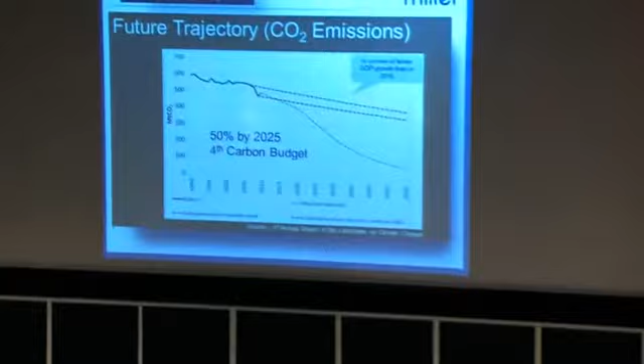This information is from the Committee on Climate Change, which is responsible for informing government to help shape policy changes. What the committee is saying is that we need to follow the green dotted line to achieve our goals. It's quite plateau, fairly stable reductions initially, because we still need policies in force and research and development.

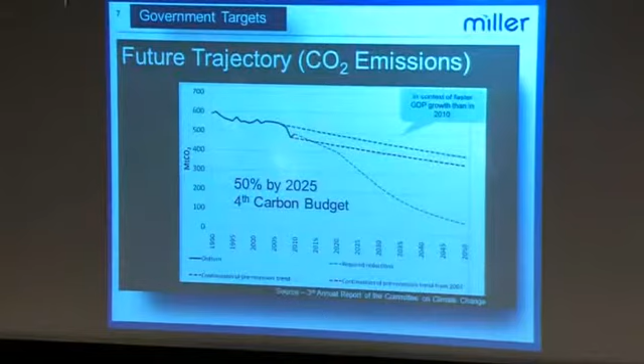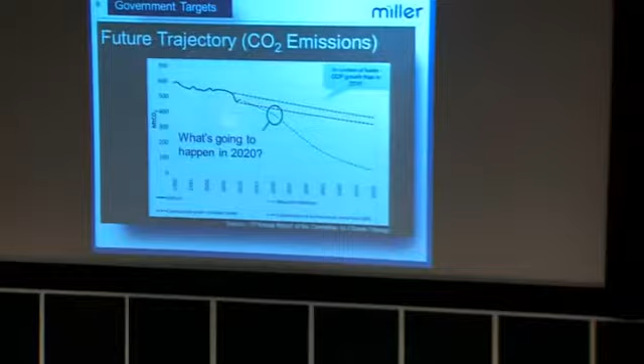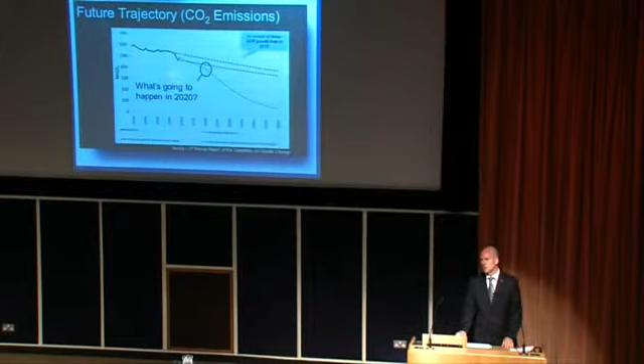There's a step change in 2020 on this green line, and it isn't just put in because they thought it was appropriate. It gives time to research, develop technology and see what happens, and time for policies to come into force. One major thing influencing this in 2020 is power stations, the grid, and electricity supply.

You may or may not be aware of things like smart grids and nuclear power stations. Will that really come into force?

As a side note, I watched a video clip the other day from a website called TED, suggested to me by my uncle a couple of months ago. I saw a presentation by Bill Gates called Carbon Zero, thought it might be interesting, and watched it. It talked about the route map to zero carbon.

One option was zero population, although that might not be the way we need to go. Population is going to reach about 9 billion, they believe, currently around 6.8-ish. But we can look at the services we use, the energy those services use, and the energy efficiency side of things.

He came out with a solution they're backing: nuclear power, taking nuclear waste from existing power stations and burning it in a deeply buried, slow-burning log fashion over a 60-year life, creating electricity from nuclear waste. Sounds good, although there's 20 years of research before they get a volunteer to build one, then 20 years of development.

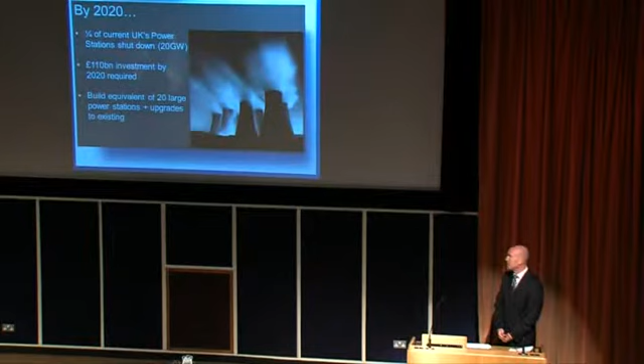Something else noted in the Committee on Climate Change was carbon capture and sequestration. Is that going to be a solution? The government has funded £1 billion this year towards research and development for carbon capture and sequestration, leading to the first trial demonstration project running 2017 to 2018. So all being well, that will be part of it. But there's a bigger issue in what you do when you compress all this carbon into liquid form and shove it into the ground and walk away, hopefully.

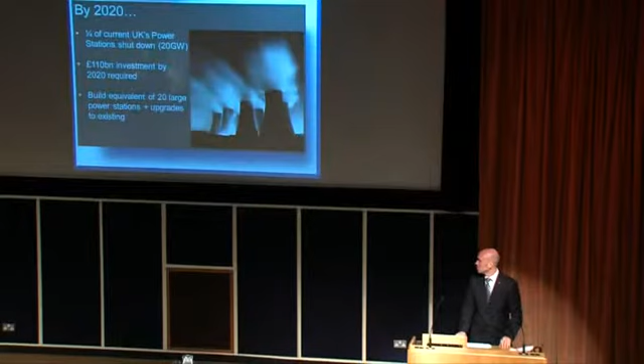We'll see. I'm getting off my comfy topic here of Part L, so I'll get back to that. This is the roadmap for the future, and every 3 years we'll have a step change in Part L, getting steadily tougher. The focus of my presentation will be on Zero Carbon 2019, which applies to new buildings. I'm fully aware, as we all are, that refurbishment is also equally important.

Since 2010, in fact since 2006, we've had Part L mandated on us via government due to the Energy Performance of Buildings Directive. There's only one element of Part L which is actually mandatory, and that's criterion 1, the carbon compliance calculation. The rest you don't need to do, but you do really, otherwise you get into trouble. The carbon compliance is something that is legally enforced.

The next set of regulations, due out next year, have already been through consultation, and we know it's likely to be 10% tougher. We don't know what the draft publication says, although that should be out soon, and we know the intention is to bring it into force next April/October.

The reason I've got April/October is I believe the mandatory part of Part L won't be enforced until October, which will probably allow software vendors to upgrade their software to the new rules and let industry test it, so if you've got buildings falling into the 2013 category, you can see what the impact is going to be. But without that, it's going to be 10% tougher.

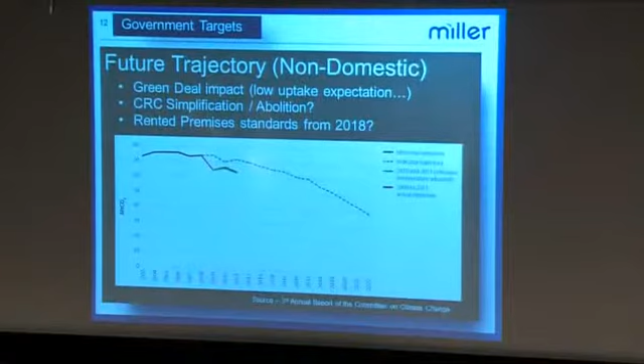I'm going to talk now about Part L, what I call the game, because in my experience over the past 6 years, leading teams modelling buildings for compliance as well as comfort as well as energy, it has become a game. And what you need to know is what's in the software that you are compared against.

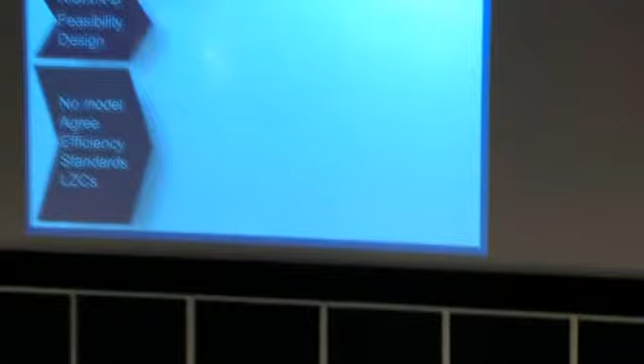Working in the consultancy industry, there's many times when I get involved right at the start. Paul, we've got a new project, we need it to pass Part L, what do we need to know? And we haven't even got a building at feasibility stage. And I say, don't worry about Part L just yet.

Make sure your design is efficient. Make sure the building's orientation is sensible, and all of the common sense stuff that architects, engineers and clients are all aware of. Put in efficient plant and efficient fabric standards, and consider what your renewable solutions may be.

Because you pretty well know now, you don't need to carry out an assessment, you know which you prefer. Do you like biomass boilers or not? Do you like PV panels on your roof or not? Is CHP appropriate for your building? And only then, at concept stage, should you really start trialling it.

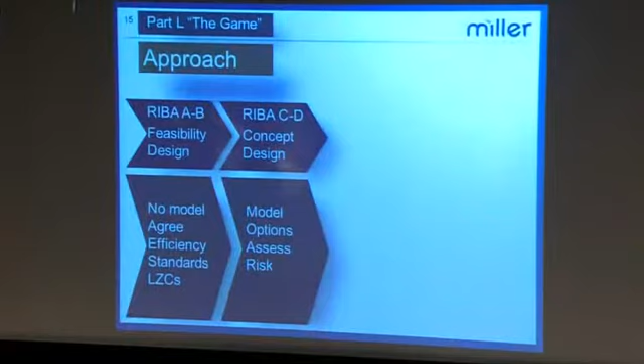Because of the way information flows and changes these days so quickly, you can spend your life trying to catch up with the design and remodel different options. But you should only model, I think, at concept stage, when you've got your building back from the architect, you're happy with the layout - you will be changing it throughout the whole life - but at least you can test, kick the tyres, stick it through a Part L model, put in your efficiency and see what the result is.

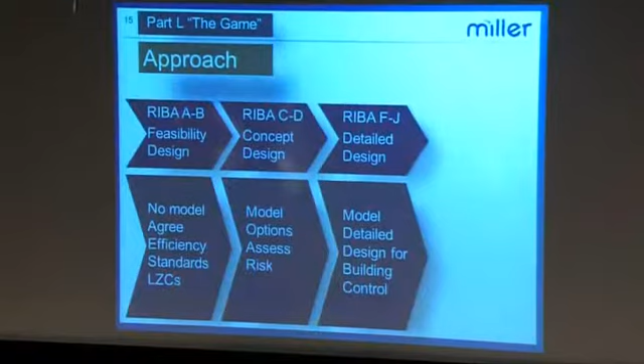At detail stage, when you're going out to tender, you obviously need to make sure that it still passes and is still compliant, because that's going to go to building control. And then there'll be very little change until the end of the building when you construct it.

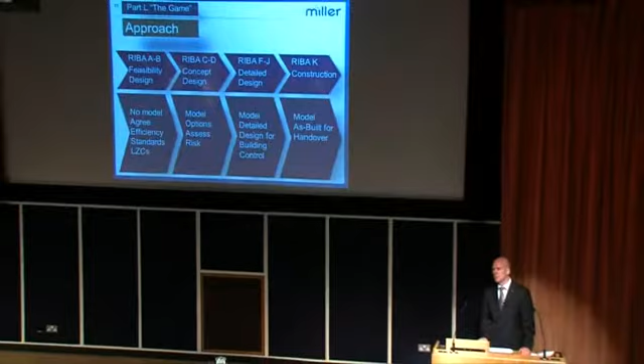The construction process might take a year, might take a year and a half, and the software gets advanced during that time, and you may rerun it and get a totally different result than you did at design stage. That sometimes throws up some problems.

With EPCs, for instance, when you've got a BREEAM target saying you must get a certain score, well, if it's going to change because the software is going to change, that will cause a problem. But BREEAM actually allows you to use the same model software version at design stage for your as-built.

Fortunately, I've got a slide on BIM, and BIM will save the day and make this whole process a lot easier. Is it working now? Well, as a consultant who's worked with BIM for the past 12 months, I've had 1 day's training, and I feel competent to rotate the buildings and do some of the simple stuff.

The engineers, when they took the BIM model and the BIM said 'I am compatible with your compliance,' we threw it into the compliance software, and we had gaps in walls and roofs, and things weren't lining up. It's not quite there yet.

If the building was designed in a compliant way for our software, for our Part L compliance, by the architect, then that'll be okay. So we could take the architect's BIM model and rework it ourselves and recreate it in BIM and then import it to the software. But you might as well create it in the software in the first place.

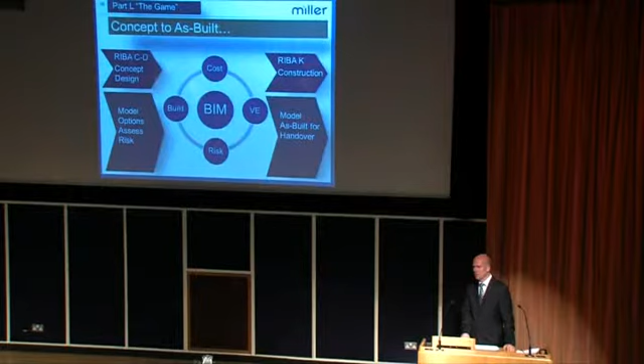It will get there, and the technology, the software, and the users will become more familiar with this. It's similar to what Dan was saying earlier, in that you don't really want the building complex when you import it into a very sophisticated software that's going to look at three-dimensional stuff. You don't want detail.

I'm going to look at a case study now of a student accommodation building and talk you through some of the quirks and interests that this project's actually had for us. I've picked student accommodation, hopefully being quite appropriate - there's quite a lot of student accommodation blocks going up these days. There's some simple main drivers: student experience, flexibility in use. But ultimately, we want efficient use of energy - we don't want to be wasteful of energy.

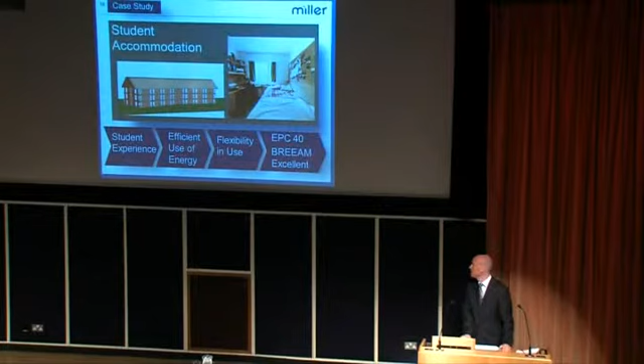There were targets of an EPC 40 and BREEAM Excellent. Funny enough, the planners said 'I want BREEAM Very Good.' The client said 'I want BREEAM Excellent.' But the planner said 'I want you to get the mandatory credits in the EPC, so get the 40, but you can go for BREEAM Very Good.'

So, early stages in the project - Paul, how are we going to pass Part L? We've got a student accommodation block. I said, don't want to model it just yet, haven't got enough information, but just tell the architect and think about some very simple factors.

Let's get back one. On that graph, there's three columns of numbers. The left hand is what I'm saying you should be targeting for your fabric efficiencies. These are U values for your wall, windows, and your roof. They're not really hard U values to achieve, and they're not going to be costly.

The window there at 1.6 is an affordable window U value these days. You can get down to 1.4 with a double glazed product, but you probably start spending a little more money. I've included Passivhaus, the German energy efficiency standard, for comparison - a triple glazed window at 0.85 is obviously a lot better. But with the fabric elements - walls, roofs and ground floor insulation - we're getting close to Passivhaus standards these days, and it doesn't add significant cost. Obviously there is a cost impact there.

The air permeability target, i.e. the air leakage rate through the building, I've targeted here at 4. Now, you are allowed to get 10, which is quite a leaky building. In fact, the computer game compares you against a building of 5. But I know, in my role currently as a contractor - a consultancy within a contractor - that we're achieving low 3s on some schools we're building. So 4, I believe, is a realistic target.

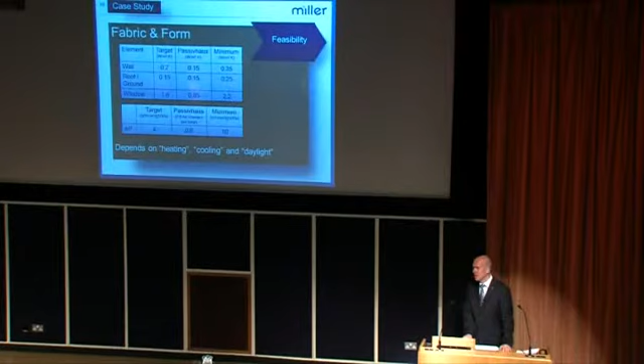What I would say is these U values and air permeability targets do depend on your building type. If you've got a lecture building, a school, or an office building, you might relax some of these figures with no impact or very little impact on the actual pass or failure result. It goes quite clearly that if you've got a heating-only building, then a low U value and low air permeability is a sensible solution.

Similarly with the services, I will say to the services engineer, 'by the way, I want your boilers to be 90% seasonal efficiency, please,' because I know the game has got about 85% in there. So if we start off at 90, that's okay. I know that 90% is affordable, because most manufacturers have a 90% eco boiler in their range.

Fans is a tough one. The power usage on fans and pumps that goes into the computer game is very low and is quite tricky to achieve in reality. But you still want to be challenging the engineers to look to achieve those targets through their design from day one.

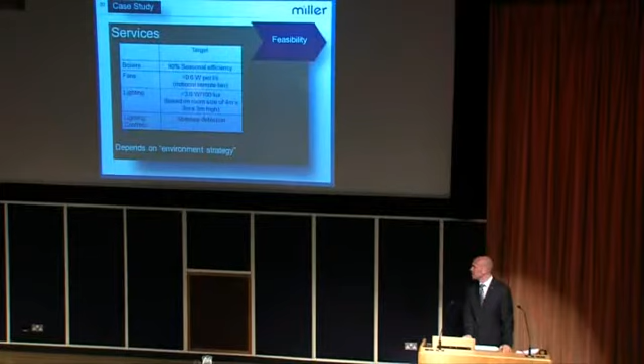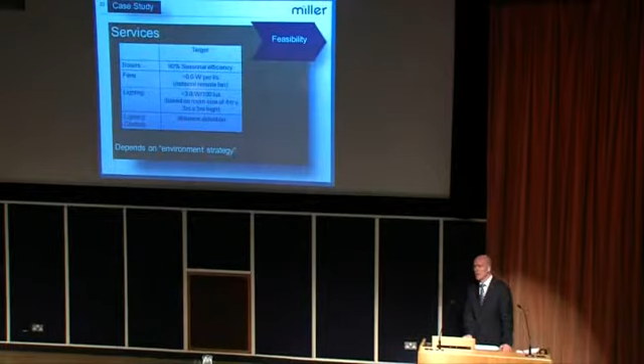Lighting is very important. Lighting on the older version of the regs was quite easy to understand, but on the more recent version of the regulations, the lighting target changes based on the size of your room. The smaller the room, the higher the target - the number increases. In a more open plan office, the efficiency target reduces.

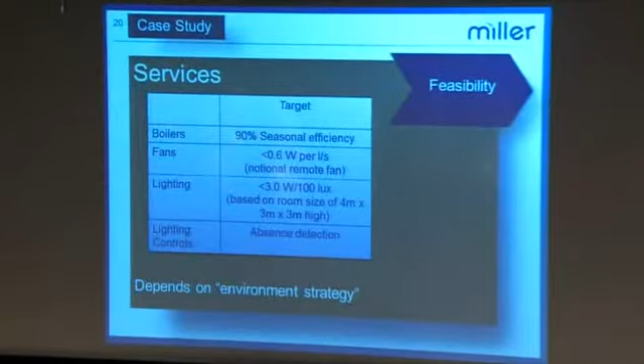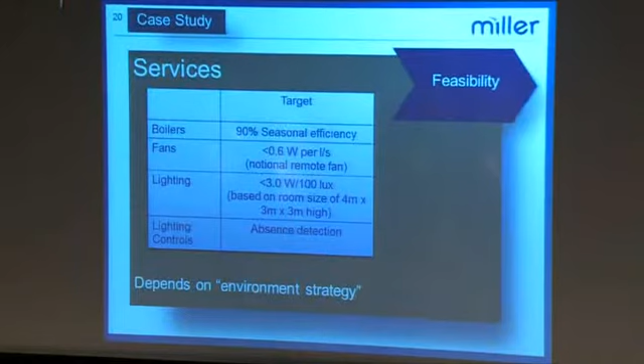So I'll do a quick assessment for a student accommodation block. I'll take a typical living space - that's going to be 80% of my accommodation. So I work out what the requirement is for a living space and tell the lighting engineers, 'I need you to achieve a number less than 3 watts per 100 lux' - watts per metre square per 100 lux on your efficacy for your lighting.

So let's go on to architects played around with the model a bit. He spoke to the engineer. We've received a BIM model. We can't import it directly, but we've used it because it gives us a great representation of what our building should look like.

We create the building, compare it against the BIM model or the 3D model. Yes, it does look the same. We have built it right. Let's throw it into the machine, put in the design data.

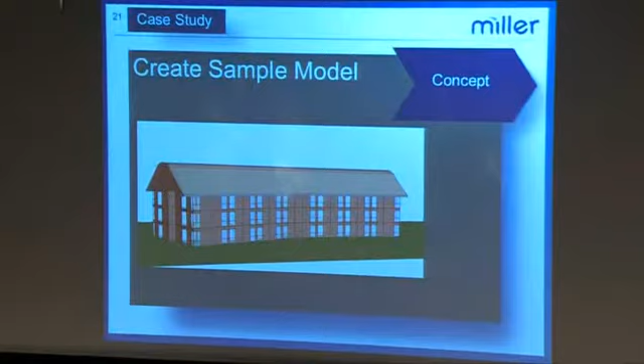We may, at this stage, actually have some feedback from architect or builder saying, can you tweak those U values? I've got a boiler, it's not quite 90, it's 89%, is that okay? Yeah, please do. And with this particular case, we passed 2010 Part L, and we got an EPC of 40.

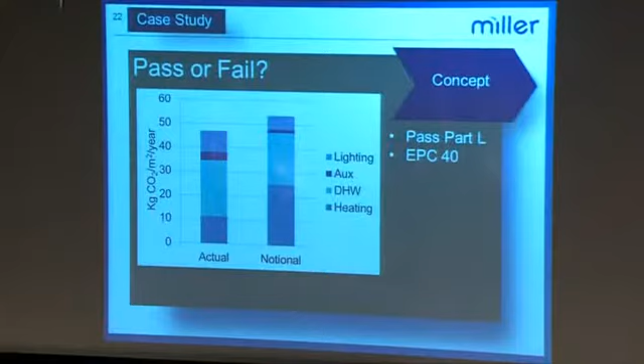Right, we can close the book, walk away, job's done. Well, sometimes projects don't go as well as that, and also I was a bit worried about having an EPC of 40 matching the target exactly. There's no room for safety as the design develops, so let's try and knock a few points off the EPC 40.

What are we actually going to do? What are we going to look at? What you won't normally get, but what I always ask for from the modelers, is these graphs. These graphs are my starting point. They'll tell me what my actual building's doing, and they'll tell me what my notional building is.

The bar chart on the right is what you've got to achieve. You've got to make sure your bar on the left is lower than the bar on the right to pass or fail Part L. The bar is split into the regulated loads: heating, domestic hot water, auxiliary lighting. There's also cooling, but there's no cooling for this building.

Once you're armed with that information and you're looking to spend money, because that's ultimately what it is, to improve an element of the building, then you can see where you should be focusing. Now, I already got in some good stuff in this building, which is why my heat load is so low compared to the notional building.

One further thing I'll say about the notional building is it just creates your building, changes the glass, puts some roof lights in, and changes the services to an ultra-efficient serviced building.

Lighting was quite high in our building compared to the notional building, because the notional building has got some really good lighting efficiencies. It's not to say our lighting wasn't efficient, it was very good, but it probably wasn't the excellence.

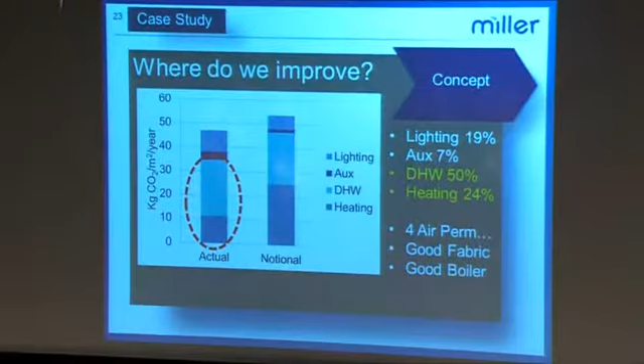I could have spent all my effort, without seeing that graph, saying let's improve the lighting because it isn't really comparing much against the notional building, and spend significant money on more expensive lighting types. Not necessarily LED, but more expensive light fittings - spending the client's money, your money. And also you've got to change those fittings.

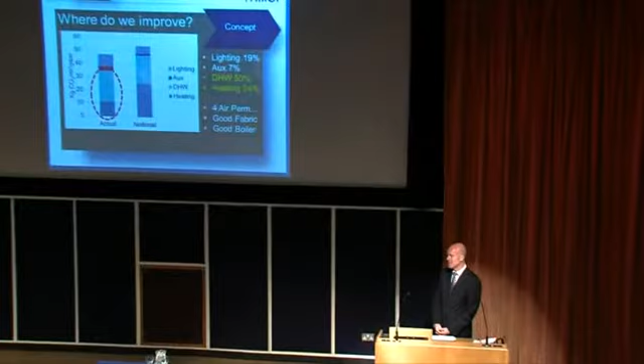Or we can just step back, have a look at the graph, and say actually no, I'm going to focus my effort on something that affects heating and hot water. What am I going to consider?

Introducing the super boiler. I found this super boiler through speaking to various people, and it increases the efficiency from 91% to 96.4%, and I can use that in my computer. That got an EPC reduction of 1 point, and it costs about 3 times the cost of a normal boiler. So it's technology which we would have to query and check for tried and tested.

We'd want to see this up and running in practice, because this is a combination boiler with a flue gas chamber in the middle and 2 chambers outside of that holding water. Your domestic hot water is in the inner chamber, and the outer chamber is your heating hot water, so you can have simultaneous heating and hot water, and it's well insulated. It's a good product, a good efficiency, but we'd want to explore it - it's got a bit of an increased capital cost element, and it gives us very little benefit.

We could use one of those. I'd never really come across gas absorption heat pumps until 12 months ago, and suddenly they're becoming more and more common. Let's talk a little bit about this technology.

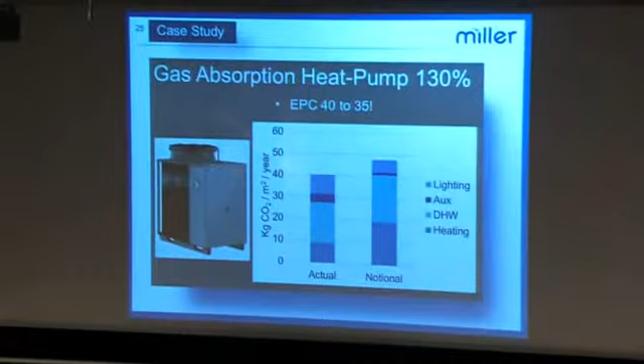It sits outside, it's got a bit of noise to it, and it sucks heat out of the air. It uses ammonia, slightly deadly, but we won't worry about that. It won't leak because they're very well installed, and it's outside anyway, so if it does leak, it won't kill anybody - it'll disperse quickly.

Again, a good technology, tried and tested. It's been around for quite a long time. And if I was operating it in reality - because when I do these calculations, I try not to forget about the real world, since it's easy to get embroiled into just chugging numbers into a computer.

Another technology I considered for this project was a shower waste heat recovery device. Now used in the domestic market, it's your soil pipe - the dedicated soil pipe from the shower - and the cold water flow that goes to the shower mixer goes through a heat exchanger. It doesn't touch the water coming out of the shower, and gets preheated.

Water takes a lot of energy to heat. The manufacturer quotes 40 to 50% heat recovery on these shower waste heat recovery devices. It'll have a big impact, and it would have a big impact on the results.

The software doesn't allow for this technology, so we would have to do a little write-up on a piece of paper and submit it to building control and get them to approve it, which they do now. Building control officers are far more open to sensible conversations around Part L compliance.

Slight digression - I had a leisure centre project where we were getting an EPC of 27 and failing Part L. A really, really energy efficient building and failing Part L. And it's because the software had limitations during its development. But through a sensible, practical conversation with the building control officer, we were allowed to make tweaks to the input data based on calculations to back it up and make it acceptable.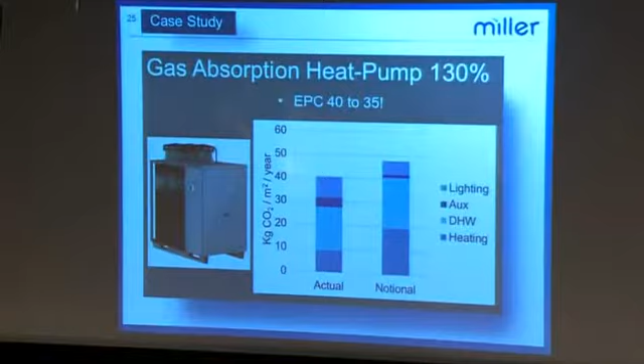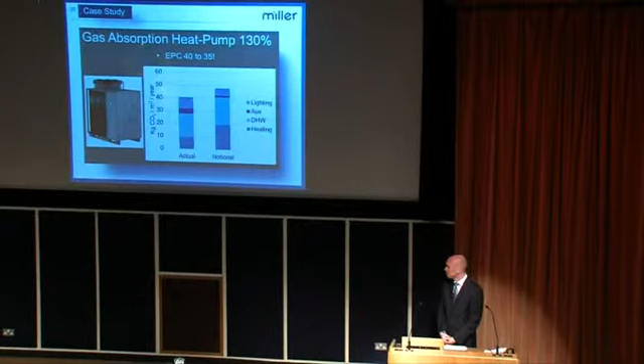For instance, a swimming pool lighting design. A swimming pool is a large area of a leisure centre project, and we're being penalised because the lighting efficiency was really, really high in the game, in the notional model. The lighting design for a swimming pool is to point lights upwards, not at the people, and when you point lights upwards, the efficiency drops off a bit. The building control officer let us match the notional building's lighting design, and all was good.

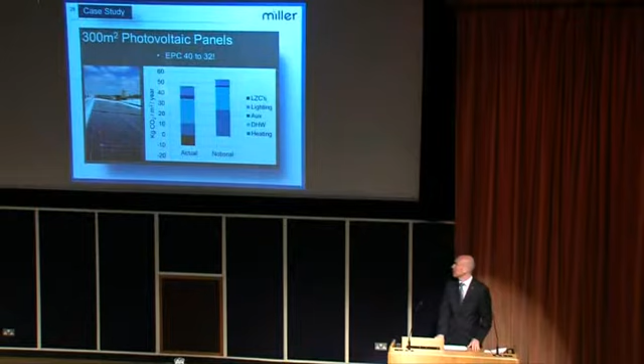But this gas absorption heat pump works really well in the model, and it's a lot cheaper than something like photovoltaics, which may be one of the first considered solutions for the project. Let's stick some PV in, that'll save the day. 300 metres squared was modelled here and gave a significant improvement.

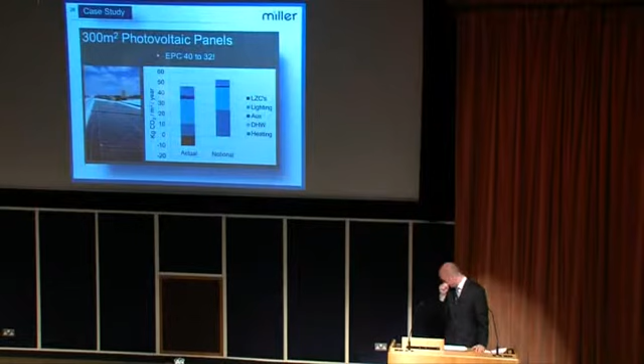We don't need an 8-point reduction. 300 metres squared would only cost £1 million. Let's bring it down to 37 EPC, so we'll put a third of it in. We'll only spend £350 thousand, and we'll comply with part of the EPC requirement. We'll have a bit of bunting in.

Or we could go back and put in one of the gas absorption heat pumps, which was the kind of adopted solution. I talk about the real world - those don't work very well when it's really cold outside, which is pretty obvious. So we have backup boilers.

So as a mechanical engineer designer, if I was writing the operation procedure, I'll say: run the life out of that machine all year round until the outside air drops below 5 degrees C, then put the gas boilers on and switch it off. And you'll have more efficiency.

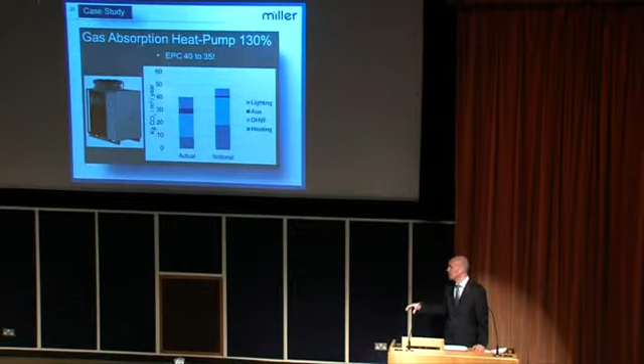We've got multiple buildings on this site, so in reality we'll be able to compare how one performs against another. So it should be quite interesting.

So that's Part L, the current strategy that I approach buildings with when I'm looking for compliance.

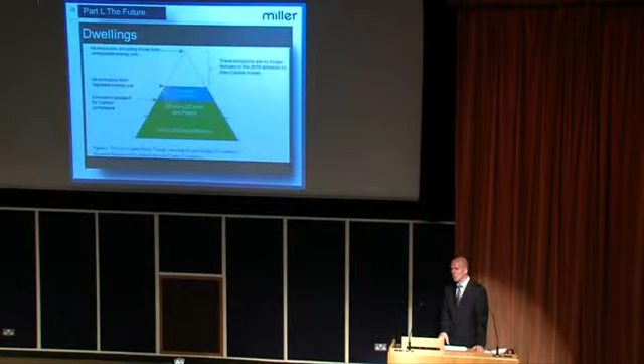And they did change the rules, which I think we're all fairly familiar with, in that zero carbon now means only the regulated carbon. It doesn't mean the plug-in stuff, the non-regulated stuff. There is talk about future changes from non-regulated to regulated in elements like door curtain heaters, which are excluded, external lighting, which is excluded, lifts are excluded. They're not part of our carbon compliance. They'll probably just make life more interesting for us.

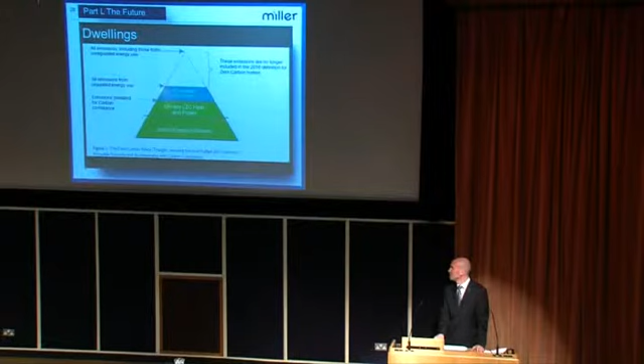So, March 2011, the non-domestic body that applies to us reviewed what the future standards are likely to be, and ultimately what we're interested in is how does it affect the look of my building and how much is it going to cost me? Is it cost prohibitive? How do we get to this zero carbon standard?

They looked at fabric and form of buildings first. They looked at U values. They did lots and lots of assessments using modelling of lots of different types of buildings, and they came to the conclusion that the U values are okay - we'll leave them as they are. This is the limiting U values.

They saw some benefit in increasing or decreasing the U values to make more energy efficient fabric for some building types, heated only building types, but they wanted to allow flexibility in design with the designers, so they said we'll leave that.

They looked at form factor. What about if we had lots of narrow plan buildings - good daylight, more energy efficiency, reduction on artificial lighting? Narrow plan's better than deep plan. Too hard - again the conclusion was we've looked at it and it is just too difficult to come up with a sensible calculation method which will withstand being interrogated by the industry. We want to leave it flexible. Buildings should be flexible for designers.

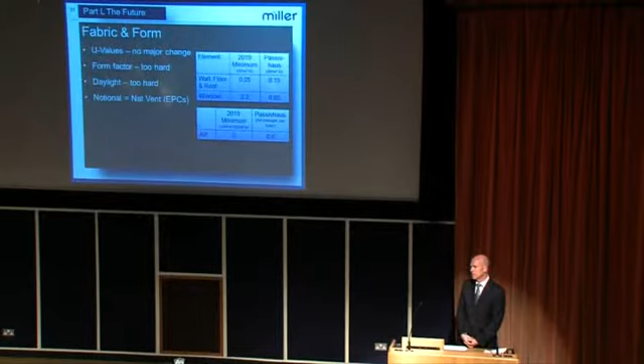What about daylight? We could introduce a minimum daylight efficiency. We have lots of targets these days and aspirations for natural daylight factors via good design of atriums and glazing on facades. But the conclusion there again was it's just too hard.

One thing they did suggest was that the EPC standard actually gives you a better rating for a naturally ventilated building, whereas Part L doesn't give you a better pass mark for a natural ventilation building compared to an air-conditioned building, because it compares the same services type. So they might look at changing that to give you benefits for introducing more natural ventilation.

They did say that things needed more investigation, such as thermal bridging and air permeability. Although I think the air permeability target of 3 in the future is almost being achieved these days.

They also looked at services. And there's something called the Energy Related Products Directive coming out across Europe, which sets out minimum efficiencies for boilers and fans and pumps and the like. So they might adopt those, or they might do something better.

They have given us some target efficiencies for plant air. So, for instance, boilers at 91% seasonal efficiency might be a target in 2019 - well, we've already got that. You can almost see how the industry's caught up by the time they've done the research in 2010 to 2011. It's almost outdated already.

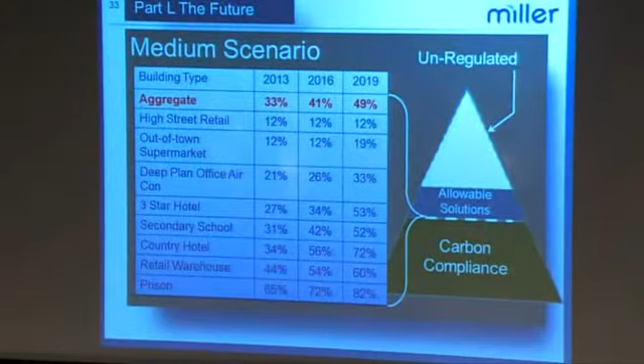What I haven't included here is a whole series of colourful graphs which are in this report, which looked at different building types and different technologies. It's really a result of all the modelling scenarios they did.

For a secondary school, for instance, where the target is about 31% for 2013, the costs were in the region of £50 to £100 per square metre, dependent on your technology. Again, I think the costing is so important to get right and is dependent on quality data.

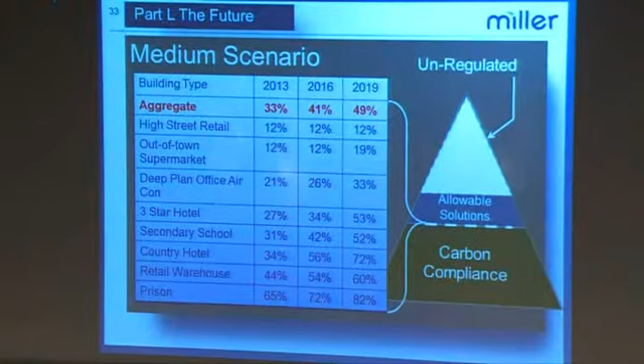PVs were about £1,000 a square metre going back not too far, but now I quote about £350 per square metre for a large array. So they've significantly reduced.

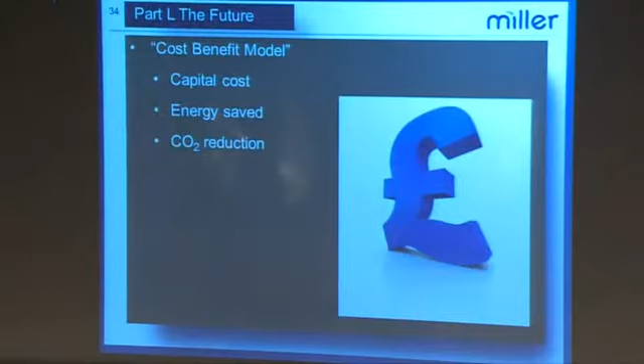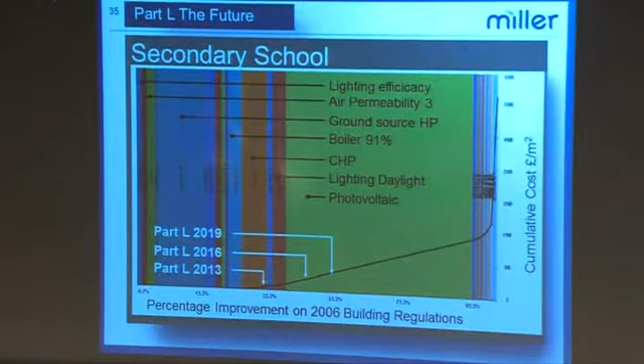There you can see that we're achieving 2019 regs with a 53% improvement at a cost less than £100 per square metre, according to these models. And what we've got there is boilers at 91, CHP, photovoltaics, ground source heat pump, low air permeabilities. We'll see.

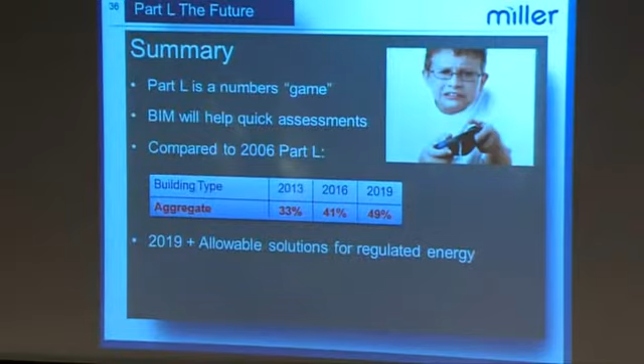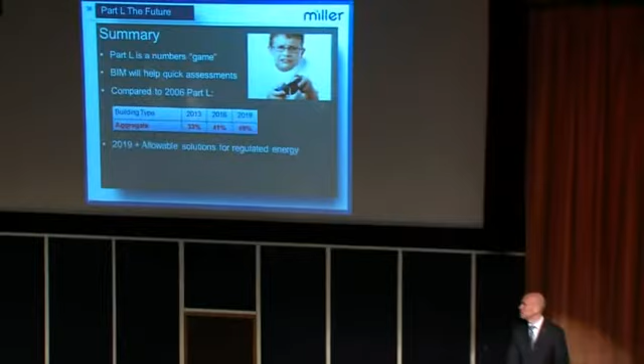So in summary, Part L is very much a numbers game. When I apply Part L to any project, every time something changes on the project, it's like, will this make a difference? Will that make a difference? I've learnt quite a few things over time, quirks of the software, what works and what doesn't work.

But it is very much a numbers game, and I can't stress the importance of getting out the results of the first pass assessment, looking at what's important, and then focusing your efforts on the major components of the regulated energy. Is it lighting? Is it heating? Is it cooling or domestic hot water? BIM will help smooth out the process and the time lag behind changes happening to the design and what the impact is on Part L. And there I've summarised, in essence, what the percentage improvements will be over time.

I've finished quite early, I feel. But if there's any questions, I'm quite happy to take questions from the field. Question from the front.

This is all to do with new build, what I've done in this presentation, and the cost is associated with new build. I was going to repeat the question. For the benefit of the camera, the question was on whether this cost affected new builds or applied to refurbishments as well. I think we know that refurbishment works sometimes almost cost the same as new build, if not more.

Is there any other questions on Part L? Compliance? Saving the planet?

Are you involved in reviewing buildings post-construction, post-completion, comparing actual consumption in use with the design energy?